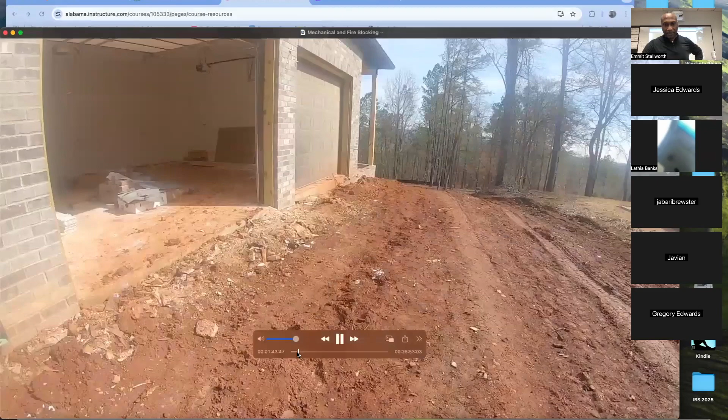There's certain things to meet code. You guys are gonna see one or two things that meet codes, stuff like that. But this is kind of where we're at. So here we go. So get past all that. All right. So here we go. Anything until that gets taken care of.

So if you guys look right over to your right, I left that over here when I just got finished talking to that subcontractor. And that's another thing, man. These subcontractors got to get on my page, man. Because he told the homeowner the price. He never should quote prices with the homeowner, because that sends a mixed message, guys.

When you have these subcontractors giving them prices, he don't know what else I need to charge them. And that's not fair to me. If he quotes them a price for the little thing that he does, I got to look at, now the painter got to come in, the plumber got to come in, do this right here. Now I got to tack on all those prices. And then when I come and give them my price, they're going to be like, oh, you the bad guy. Y'all see how this works?

So he doesn't need to quote a price. He should have just said, well, hey, okay, I got what you want. I'll get with Emmit and he'll get your cost. That's how that's supposed to work, guys. So when you're dealing with these subcontractors, you got to engage with them, man. And I remember one builder I knew, he wouldn't even let the subcontractors talk to the homeowner. He didn't even allow it. Now I understand why, because they just don't get it.

All right, here we go. Come on, guys, it's about business. I got to get rid of all these boxes out of here, man. So my HVAC guy should be here. We can hold on to these right here. So these are all the vents that we're going to put in when the floor is getting in.

Oh, we got to go to the unit. Yes, we haven't even gotten, so I guess you're going to connect it to that right there, but set up. It's always a good thing. Here, might have to do another trail. Get out here.

Hey man, how y'all doing? Everybody good? Good deal.

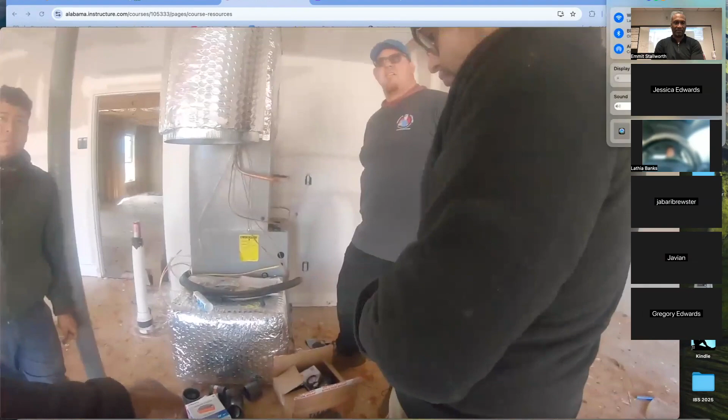All right, so I'm gonna need a bollard right here to keep these cars from hitting it. Okay, I see what you're saying. Yeah, probably most likely it's gonna be right here. Yeah, I think the code guy put it right there. You ain't got no pencil, do you? What do you need? Sharpie, pencil, something. I got one in the car, but I just want to kind of mark that. There we go. So about right here, right?

Is it posted, just in case. So that's for the unit, that's when cars come in, you don't want that car to hit that. So we're gonna have a little stop right here, and I'm gonna need one over there too.

Yeah, so that's another code thing, man. The code is gonna require me to put what they call a bollard, so that when cars come in they won't just hit the unit. Somebody, like my wife, won't come in and make a mistake and hit the unit like she hit the garage door.

Y'all need anything? Any questions? I got a question actually. So we gotta be within a 5 foot radius of any windows or basically anything for those IPEX.

So I was about to call my boss also. This whole sheetrock thing actually messed it up. We were trying to run it above all the sheetrock so you won't be able to see it. But now with the sheetrock there, I'm trying to see, I'll just show you.

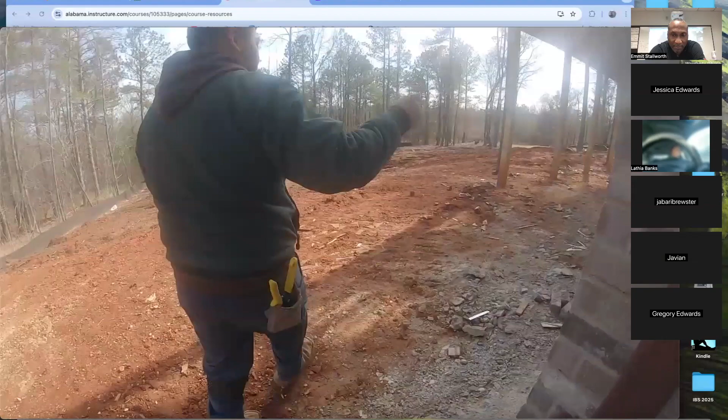I need a hole, about a 4-inch hole. I want this to work for you. That's fine. Do we need a bore hole there?

No, the deck is coming down right here, so that's not gonna be in the way. You need a hole right here? Yeah. Where you need it at? 5 feet from windows and deck.

Okay, you point to the place where you want it at. I mean, yeah, you can put a hole there. You got something that can drill it? That's the thing I don't.

Okay, so I had the guy do the holes over there already. I wish I'd have known, I could have gone ahead and put you guys a hole here too.

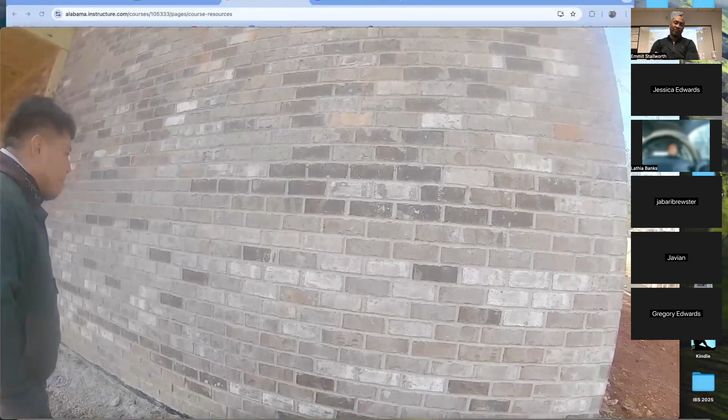Yeah, we don't know, this is my first time coming to this. Tell you what, mark where you want that hole at, and let me see if I can get somebody that can get a hole there for you.

Okay, and also, are you the builder? Yes, sir. Okay, and also I was gonna ask, you're gonna have to run it under the sheetrock. Is that okay? The only thing is it's not gonna look as pretty.

I'll tell you what I would do, or I'll give you another option. You can run it, you can open up the sheetrock, the decision's right here. Run the IPEX over, come on.

Where does that come up at? It's coming up from here. Yeah, it's gonna come over there.

Go ahead and run your piece up if you can get up in here and not mess up you guys' stuff. Because the reason we had to do the sheetrock, guys, is for the fire protection. It's a firewall.

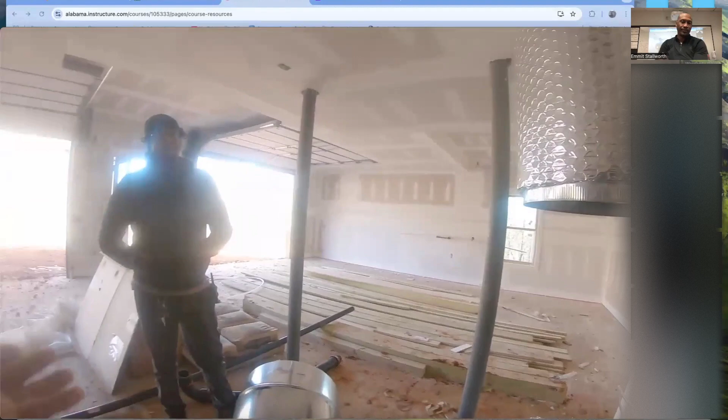Yeah, so you can run up in here. I don't know if you can see, but you got to cut a hole every so often to get your pipe through it, and then you can run it up.

You might be able to get it up in here. But however you gonna do it, you're gonna have to come down over here somewhere. Yeah, I'm gonna have to go over there. So if you got to come down, I think right here, then go this way, that's fine. I would try to wrap this.

Like if I got to come out right here and then wrap up around here, make it stay as tight as possible to the ceiling. I don't have a problem with that.

You can go out there and mark where you want your hole at, and I'll get somebody to figure out a way to get a hole in there. I put the holes over for your Freon too.

Yeah, so if I'd known, I'd had that guy put those in there too, drill those holes in there too. So yeah, if you got to go up in there, that's fine.

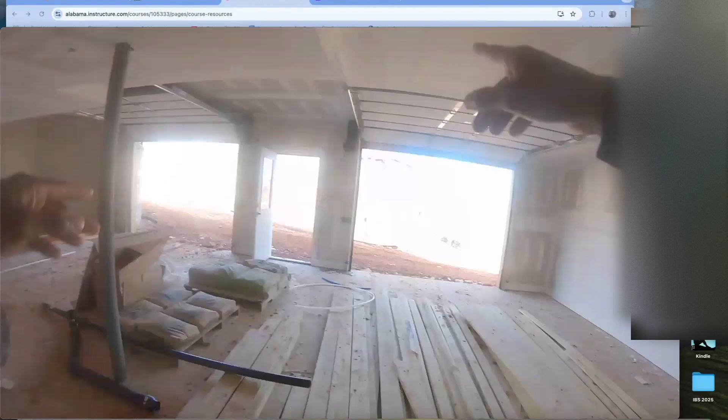So that's the pipe that's gonna stick out, right? That's it, so it's gonna stick out there. So I'll do the measuring for this. Okay, but you can't go...

Well, you gotta stay away from the window. 5 feet from the window, 5 feet under the deck. So looks like you need to be about right here. Yeah, that's the only option in this one.

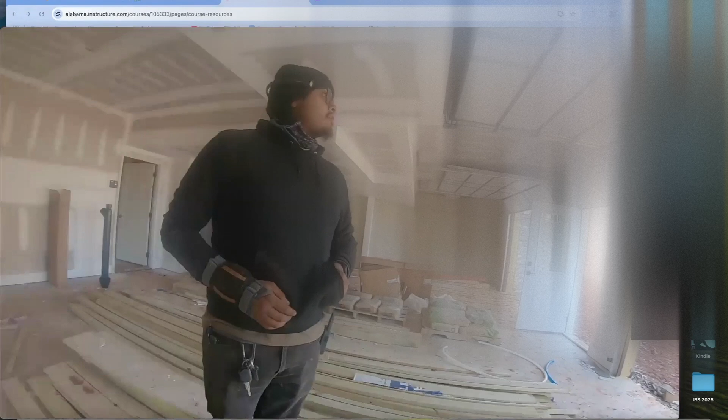That's fine. Can you go straight out that way? It's still the door. Oh, you got that door. Yeah, that's it. It is what it is.

Well, I just want to make sure with you. No, man, you guys are good. I'm gonna fix all this sheetrock stuff because we got all kind of stuff. My painter's gonna have to come back, and the sheetrock guy, they're gonna come back and fix it. You see?

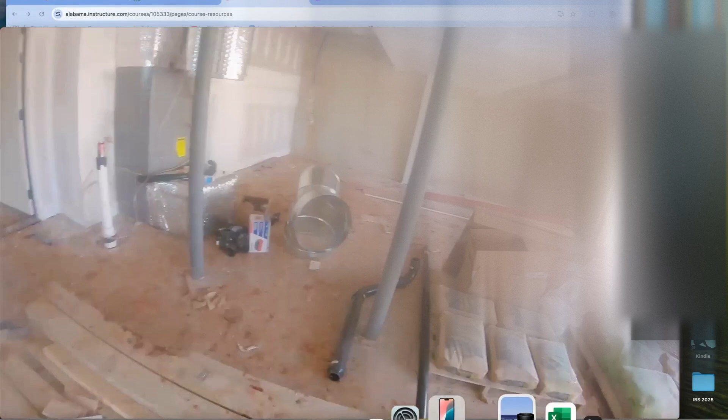Okay, all right guys, anything else? I'm glad I came out here. I think that worked out pretty good. You guys do a good job, man. I'm Kerry, man, he's the best. He's the best I've seen, man, and I've been doing this 20 plus years. All right man, you guys have a good one.

So I'm just kind of looking at, if you guys understood what he's saying, those pipes, that's a 90% efficient unit, so that unit is going to be more efficient than a regular gas unit. It's like 90%. So either you put the 90% unit, and I should have a heat pump upstairs, but that's going to be very energy efficient for these. Heat pump just means all electric, so the unit I saw first, that's all electric. And this right here is going to be gas, but it's a 90% efficient gas.

They ought to like that. But when you're exhausting out with that gas unit, you have to be so far away from a window, which is right here. And then you can't be under a deck, because those fumes can't go up and get trapped under that deck. So that's another thing, guys. So I'm just kind of coming back here.

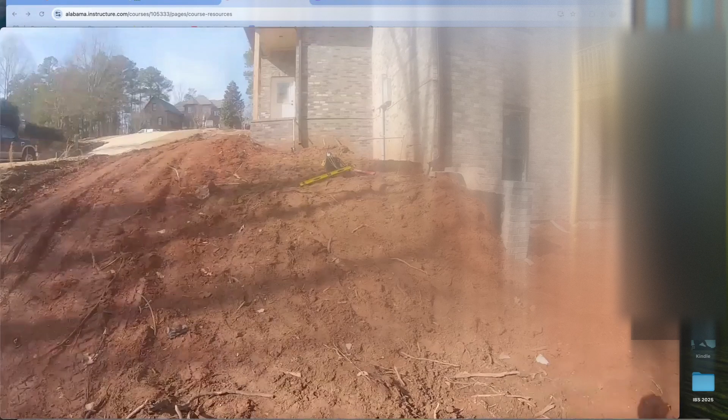So those guys are going to come out that wall right there, and that's what my units are going to be. Let's kind of see what my units are going to be. We may have to - let me just ask this guy one more thing. Hey man, I got one more thing. Do y'all know about the condensers? Do y'all know where y'all going to place them at? Let me just kind of have an idea of where they're going to go.

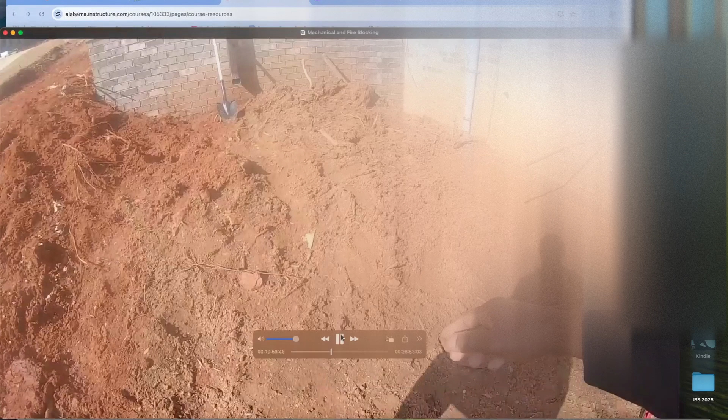It's another thing right here too, guys. I don't think you can go right by that power box, but you can put it right here on the side, this one on the side and that one right there. So you got one - where you set the little unit outside, we was gonna put this right here, but the HVAC guy put his stuff right here. So this has to be so far away from this by their code. This power box had to be so far away from the vent, from the dryer. So that shifted this guy over, right? And since this guy shifted over, then the units was going to be right here and right here.

So now I'm going to put one unit here because it's got to be like 6 inches away from the power. So I put one unit here and maybe one unit here. Does that make sense? All right. You got one that can go right here. I think one can go right here and one can go right here. I don't have a problem with that.

Okay, now if you can get both of them right here and it's not against y'all's code with this right here - I don't know your guys' code like y'all know it, y'all might want to get with Kerry. I don't know how far I got to be away from this guy right here. Yeah, we're gonna have to put it in. So if you put it here, I don't have a problem with that. And he had to shift his over because of this dryer vent.

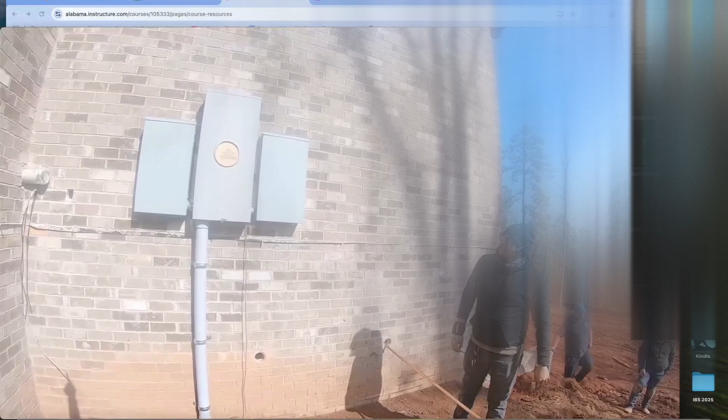Yeah, you see that dryer vent there? So he had to shift his over, which shifts you guys over. Or if you got your gas, it's gonna come out right here - the gas stub out is gonna come out right there. So you can't push it. So if you gotta put one here and one here, I think that'll meet what you need to do now. I guess you have to wrap that thing over here. Yeah, it is what it is. All right, we'll put a bush there to hide it.

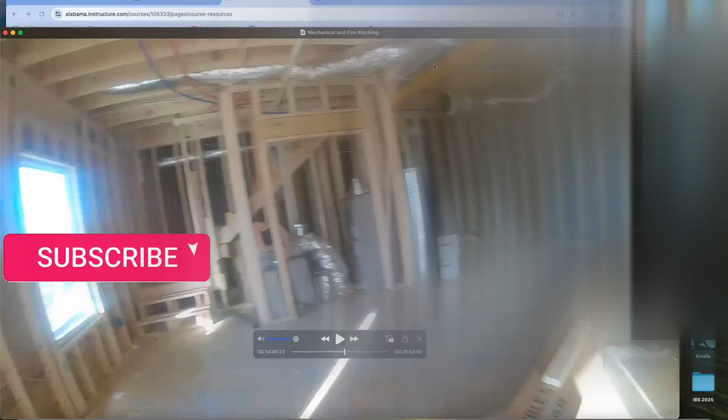All right guys, so let's see, he ain't got everything connected, man. This dude is just - he left the unit there, and now I gotta lock the house up every day. It's just, man, I tell you what, bud.

Couple different things, like stuff like this right here. I don't know if you guys can see that right there, it's just not good. Things like these guys got some of these studs - they're not supposed to touch the wall, guys. He said a half inch, I thought they're just not supposed to touch the wall at all. I got to look at that code because they're touching the wall.

Now, on the insulation, this wall right here really doesn't have to be insulated because the ground can be considered insulation. That's what the insulators would tell you - that's something that my insulator told me. Looks like we got a hanger that can go up there, so that's good.

Things like that. Let me organize here, I'm gonna put this up right here so the framers can come over here tomorrow. Good thing, and those are my hurricane clips. I'm gonna look, there's one or two more things. Let me see, did I talk about...

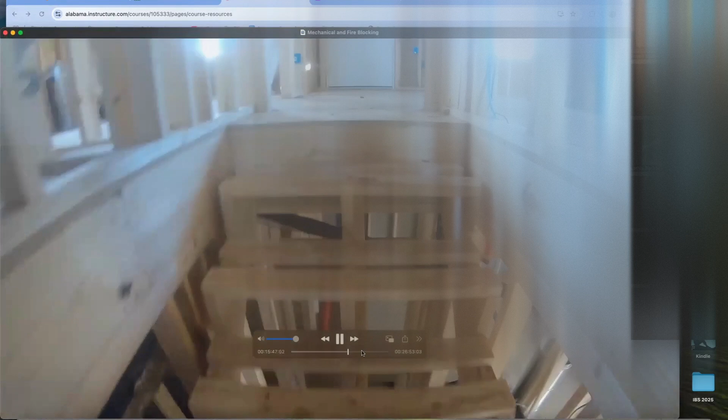So what I'm bringing here, guys, is hurricane clips. That was one of the things he hit me on - tie down, and the code item just hit me. A rafter tie down. So really these rafters, if you look up here, if you look right here, these are the rafters right here. So they have to be attached to this top plate. You have a double top plate up here.

So those clips, you're gonna put nails here, and those nails are gonna go here, and it's gonna grab both of them and hold them together. So that's what you need - the rafters, they need to be attached to that top plate. Yeah, so that's what I'm bringing.

Now you can actually do this with lumber - you can take that lumber and come down, but you got to attach to this. Well, you can't do it on - you can only attach to the ceiling joist. You can do it with lumber, but you got to attach to the ceiling joist itself, not the top plate, right here, because you really got to attach to a ceiling joist.

So what I'm going to do - I think these guys came over here and kind of cleaned up a little bit. Looks like things are kind of organized here, got everything off. So here we got, you can see, the inspectors are going to give you this card right here. I'm looking for, like, one of them you may have building, mechanical, electrical, and I'm looking for the rough inspection to be signed off.

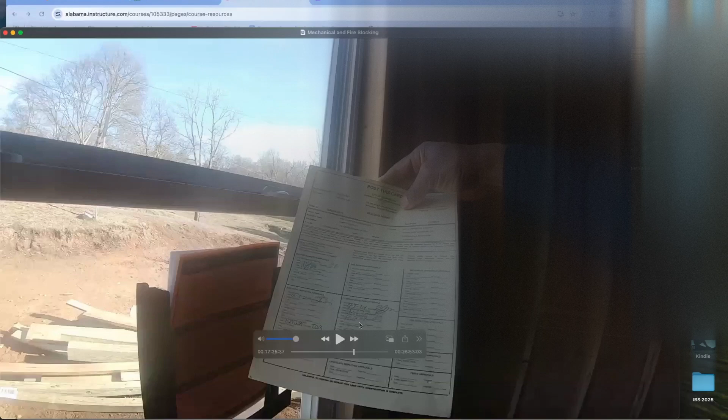So that rough inspection is not signed off. Like right here, I think this right here is the electrical. Mechanical is right here - he hadn't signed off on the mechanical yet. Plumbing, the plumber got his signed off on. This right here is the slab, foundation slab, when we're doing all that stuff, the footings and the slab - so that's been signed off on.

Electrical rough, walls and ceilings is off. Still don't have the mechanical guys, but he made a note on the back - it says mechanical is just not complete. It's okay, partial mechanical rough. Oh well, I'll tell you what, we'll be fooling around here with mechanical for a year.

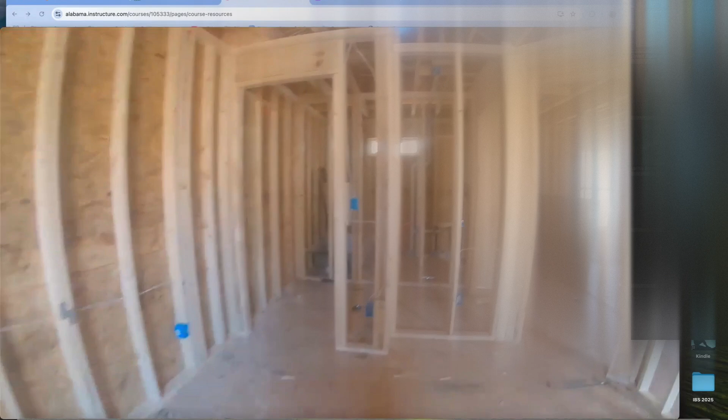I'm looking at my vent fans. He still hadn't - taken me, the vent fan, if you guys can see up here, yeah, so that's the vent. This needs to have a pipe that goes out the top of the house. He hadn't done that yet.

Yeah, I just don't get it, man. He cut a hole in the roof, but he hadn't connected the pipe yet. I just, golly, man, I tell you what, man. He got a hole in it, but he ain't put the vent up there. Oh my goodness, boy, this is what I tell you - it's a wrap, man.

We'll come through here. Guys, I like to try to find all the holes before I stick this thing up in here because I hate to use a whole thing of this stuff. Oh yeah, this right here needs to be sealed, that whole area. So I need to bring something else to do that. See any, things like, let's see, I don't know if I can get up in here. Let's see if I can get a picture of it when they get started.

You see that right there? See it around them pipes with that orange stuff. So if there's a fire that catches in the basement and it's trying to go up to the top, it's sealed so that the fire has to burn through that orange stuff in order to get to the top and set the top on fire. Gives the people a little bit more time to get out the house. Does that make sense? All right.

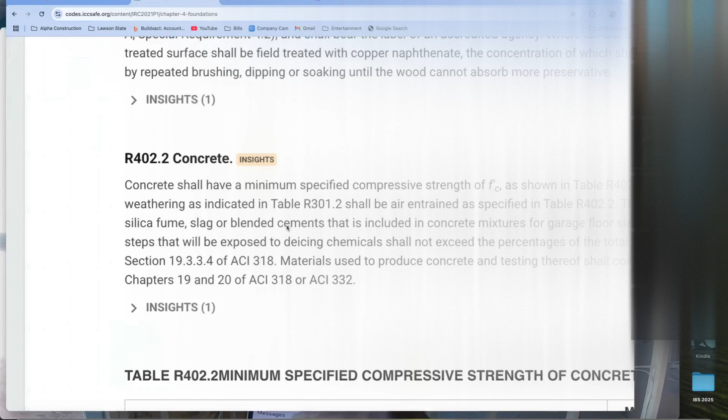Okay. The concrete itself. So guys, you don't have to guess about this stuff. You can go right down here and it gives you the different type of foundation that you got. You got slab on grade, which is like a monolithic slab. You have a crawl space.

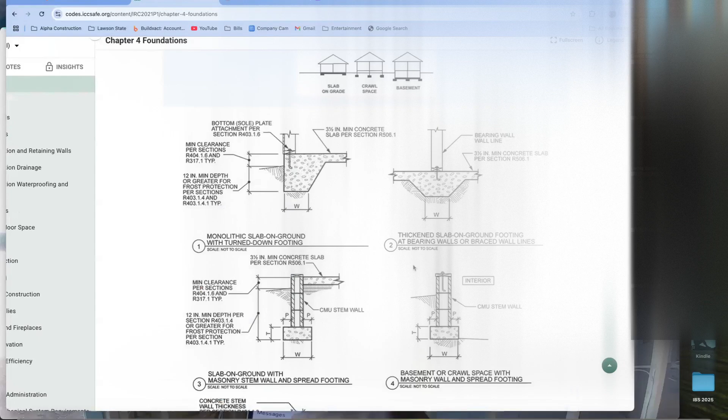Remember, crawl space, you got a wooden flooring system on it. And then you have a basement like the house we just got finished doing. Okay. So you got all that, and you can go through and it just breaks everything down. So this right here will be like a slab on grade. So this would be a monolithic slab. The slab and the footing is all one pour. We call that a monolithic slab on grade.

And then on the interior walls, the interior load bearing walls, we have what you call a grade beam. A load is hitting that grade, so you got to pour that concrete a little bit thicker in that area. Then this right here, this will be where you have your regular footings and stuff.

So this one is a footing with blocks, and CMU stands for Concrete Masonry Unit. So it could be blocks, or it could be... I mean, they make a lot of different types of concrete masonry units, guys. Not necessarily blocks, but blocks is the most common one. So you also have your footing as well. And you have your anchor bolts.

Y'all see these anchor bolts here? I wanted to show you guys something about those. You guys do know what anchor bolts are. You anchor that, it keeps the house, like when the wind comes and tries to uplift the house. This is what the anchor bolt does. It holds that bottom plate on the ground.

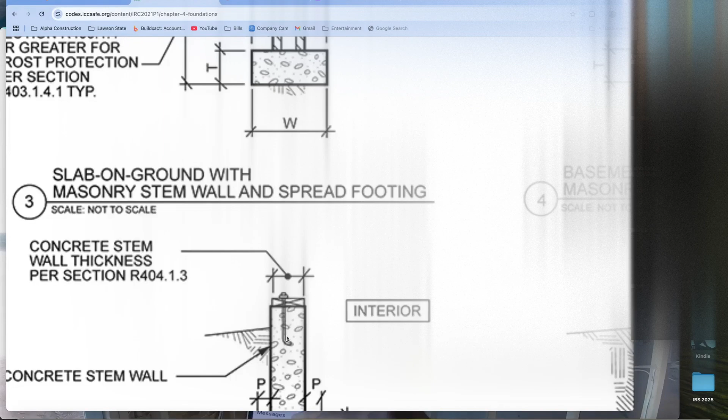And I had a good YouTube video on that. Let me just see if I still got it here, guys. I think I still got it here. Let me see. I can't get down here. Let's see if I got it in watch later. I think I got it right here.

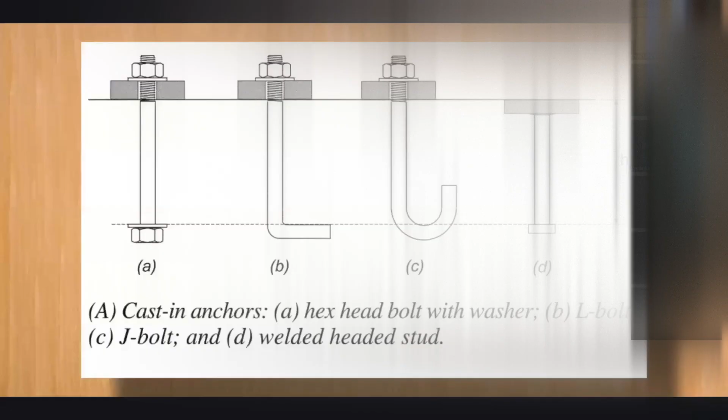This is an L-bolt. If I see these on one of your projects, I'm probably not going to say anything, but I might give you this look right here. L-bolts and J-bolts fall into a family of cast-in anchor bolts where they're used to tie elements down to concrete. They've been used for decades, anchoring your walls down to the foundation, or anchoring deck posts down to the foundation, and they've been used by our friends in the steel industry to anchor down column base plates to the foundation.

These things are very strong, they're very durable. However, engineers are phasing these out and just aren't using these on our projects anymore. L-bolts or J-bolts should not be used where they're required to resist uplift forces. Uplift forces I'm referring to are wind-induced at the roof level, which transfer into the load-bearing walls, your rafters, or...

Hey guys, by the way, we're in that area where you get a lot of uplift. Tornadoes and hurricanes, we're in that area, Alabama, Florida, Texas, and all those areas. So by code, we're in those areas.

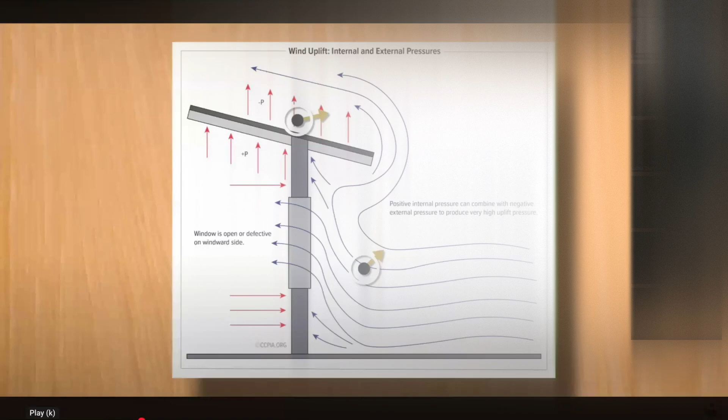If the wind force acting on your building is greater than the weight of the structure resisting the wind force, your home will have a net uplift force. But based on updated wind design speeds in recent editions of the code, it's safe to assume that the average single or two-story home will have net uplift forces. It's not that this thing is weak in tension. There's only a small portion of this rod that can be utilized to determine how much this can resist as far as uplift. And that scenario is what we call pull out, the ability of this thing to stay in the concrete without completely separating out of it.

When we do that calculation, I can only use part of this bar that would be in direct contact. Now, you would also think that if I pull up on this, there's concrete around the bar that's in contact with this concrete from friction. But unfortunately, we can't use that friction in our calculation. Now, the other reason why I don't utilize these is because of constructability. These are cast-in anchor rods, which means that these have to be installed into the concrete before the concrete hardens.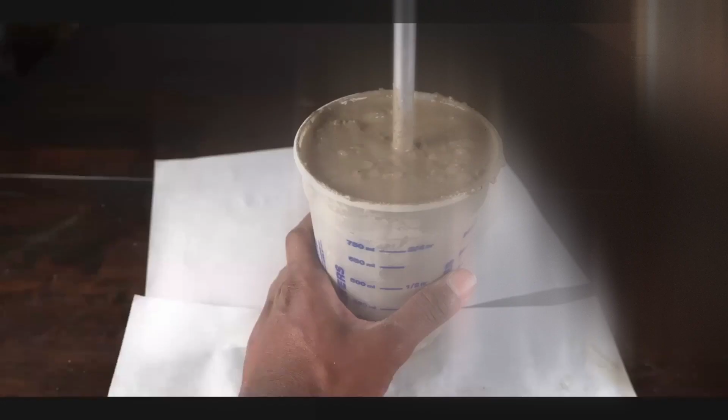So you need to move quickly, making sure that the anchor is deep enough, it's spaced at the correct spacing that's required, and make sure that the anchors are straight and plumb so you can thread your sill plate through the anchor rod and then fasten it together. Ask anyone who does this for a living. It's difficult. There is another class of anchor bolts that I would recommend that can be installed after the concrete hardens, which we call post-installed anchors. So the type of anchor that I typically specify is what's called a screw anchor.

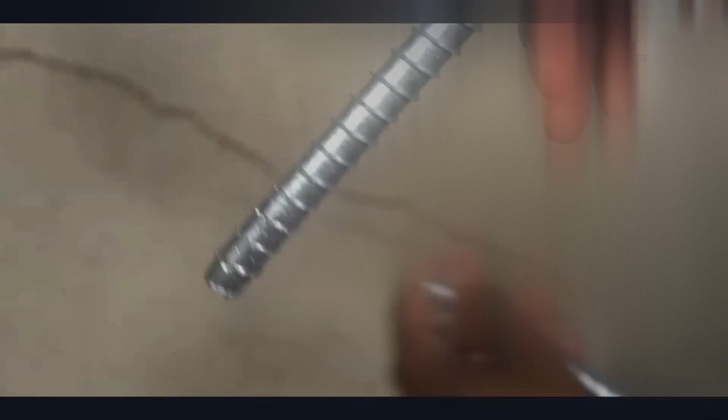It's exactly what you think it is. It's a screw with the threads around there. The way that this is installed is that you drill the hole first. You clean out the hole you just drilled. You set your sill plate and then literally screw this right into the concrete and tighten the sill plate. These things are strong. They have a lot of capacity, if not more, in some cases than a cast installed anchor, and these are available everywhere, including your nearest hardware store.

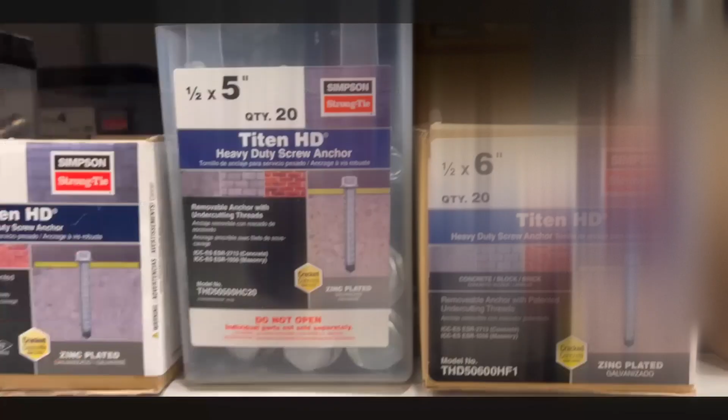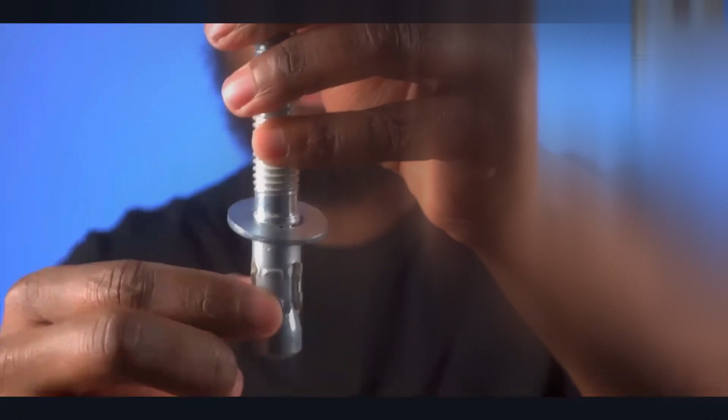Another option pretty similar to the screw anchor is what's called an expansion bolt. These things have great capacity, in some cases even more than what a screw anchor has. And it's installed the exact same way. The only difference is that when this is tightened to your sill plate, these flanges at the bottom right here will push down and into this bumped out piece, and these will spread apart, locking it into the concrete. So it's another great alternative as well.

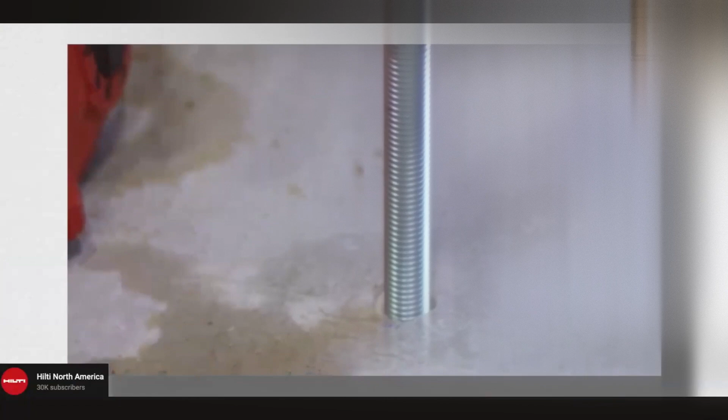And the last is similar. You drill the hole large enough where you can set your threaded rod inside as deep as it needs to be. And then you have this epoxy material that gets poured into that hole, creating this really tight bond to the concrete and to the threaded rod. And these are honestly one of the strongest ways you can anchor something into concrete.

Now, I'm mentioning this, recognizing the fact that the International Residential Code allows L and J bolts as a foundation anchor. So depending on the codes wherever you live, they may be perfectly fine. However, if you ask an engineer about using L or J bolts, they're most likely going to tell you no. And for individuals who don't really have a lot of experience doing building construction, there are so many options that provide the same capacity as an L or J bolt without all of the skill that's necessary to be able to install J bolts correctly.

Questions on that, guys? It's like, man, YouTube is great, man. I'll tell you what, man. You guys make a YouTube channel, all right? All right, let's keep this thing moving, guys. So let me just see, where was I at? I was right here. All right. So let me see what else we have on here.

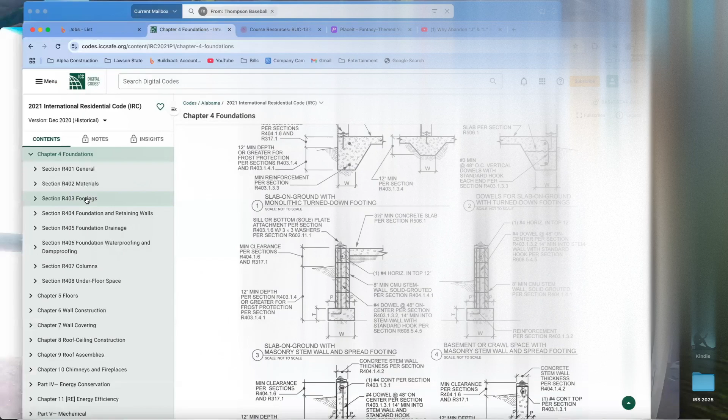Now you can also, I think this may be a wooden foundation, pressure treated foundation. So this is another. All right. So let me kind of go right here. So we have chapter 4, foundations. So you have the general, you have the materials, you have footings. We talked about footings, foundation and retaining walls. So you can hit that and you can kind of go over the foundation and retaining walls. So this right here talks about those foundation walls that we use.

Retaining walls. Are you guys familiar with those foundation retaining walls? Have you guys seen foundation retaining walls? What's going on, man? They look like this here. Sometimes I might have to have all this stuff already pulled up before you guys get here. I always jump off into something else, man. Let me just see.

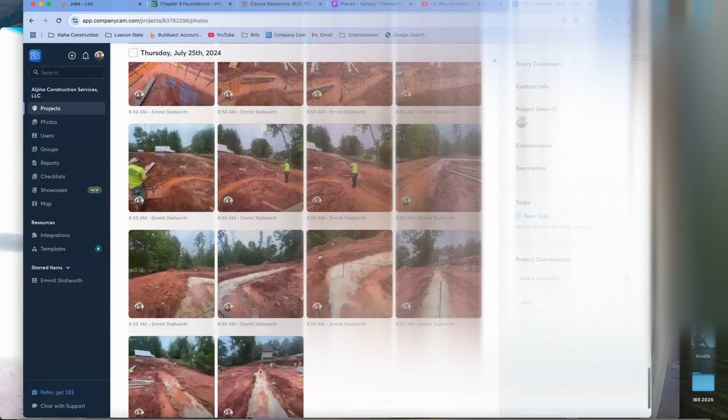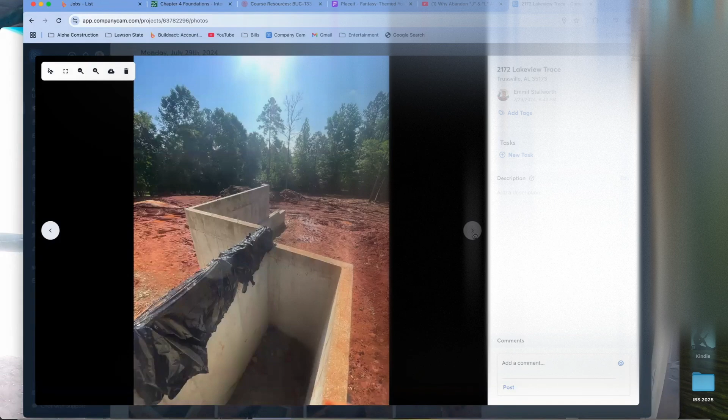So this is my foundation. So we got your footing here, and this right here is my foundation retaining walls right here. And I don't think I have where they actually formed this one right here, but you gotta put those anchor bolts in those, and you gotta put dowels in. This is what the foundation walls look like. So that code that we were just looking at addresses how those walls are supposed to be set up, how thick they need to be, the reinforcement that you're going to have in them.

Are there any questions? And then you can go right here. So now we can go to foundation drainage. And then you got the different type of soils that's involved. You have precast concrete foundation, wood foundation, how you drain that, drainage system. Then you got waterproofing. So now, say for instance, on this particular house right here, let me just see if I can get you guys. See, this is the walls right here. You guys can see where I have the brick ledges. This is where I lay my brick at.

And then what else we got here? Then we're going to break that down. We get into the waterproofing. So now these guys, and I didn't catch them before they actually did it. Let me see if I got it right there. So this black stuff that they got on here, it's kind of like a tar.

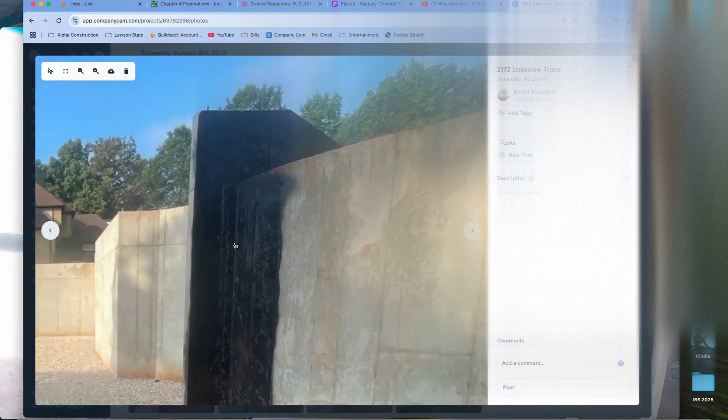That's my waterproofing. So they sprayed that on there. So it keeps that groundwater, so when that water comes in through the ground, it keeps that water from coming inside. Because you guys got to understand that concrete is actually porous. Got holes in it. Sucks up water. And so you gotta waterproof that.

Now that may not stop water. You're probably gonna have some remnants of water trying to get in there. So what you got to do is if it gets in, you got to go on the inside and deal with the water on the inside. So they use hydraulic concrete to put on there and patch it up on the inside to keep it from leaking, keep it from coming on through. And that hydraulic concrete, when it gets wet, it expands. So it really locks that water in. Does that make sense? So this is what the waterproofing part of it looks like.

So also with that waterproofing, you have a foundation drain tile. Remember, I think we talked about that in another class, where we had the gravel that's put down there. You got this drain tile with holes in it so that groundwater goes through that gravel, gets sifted through the gravel, keeps all that dirt from getting in there. Once it gets into that tube, then it flows to the daylight. Goes all the way out to it.

Yeah. Now you know you got a driveway coming down right here, right? So we're gonna get a solid pipe, not the perforated pipe, and we're gonna run it up under the driveway and dump it out on this side of the property. Before you pave the driveway? Yeah. Before we pour concrete. You can see the gravel.

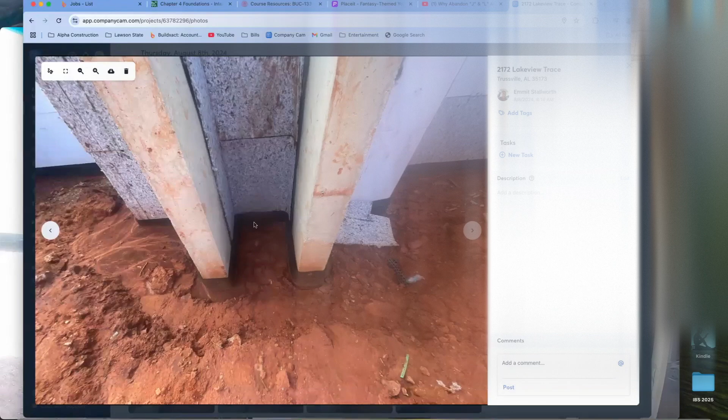So this is what the waterproofing looked like. See how that little sock thing comes around here, goes around here, goes around here. It's taking all that water. And this is what it looks like if I make it bigger. This is what it looks like when you open it up. You got these little holes in it. Takes that water and moves that water around. It's like that plastic? Yeah, it's a hard plastic. I think I picked up one of them and took a picture of it.

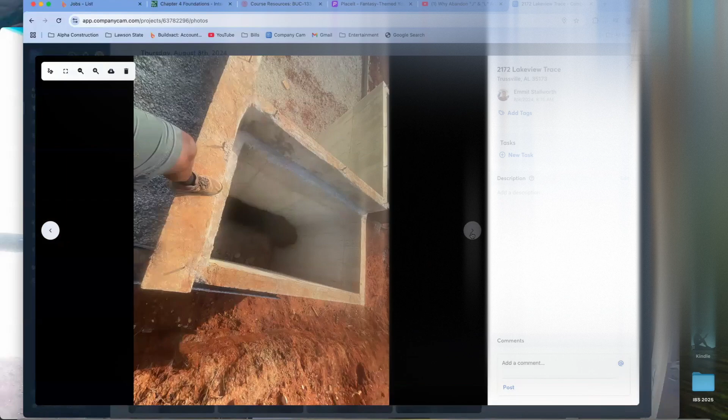And you notice I also had that pipe going all the way through this little stoop right here. This is what it looks like, you see? And the reason that we got this foam right there is so that when we do our backfill, the rocks and stuff don't break this black seal. See what I'm saying? You don't want it to bust it open, then water gets in there.

Ground rod, I did earlier. Yeah, there goes one right there. There goes a ground rod right there. Yeah, it goes into the concrete. Goes into the footing, and it attaches to the rebar in the footing. Let's see what else I got. There goes another ground rod. You see that ground rod right there?

Oh, shucks. Oh, man. I hate when I do that. We got to figure this out.

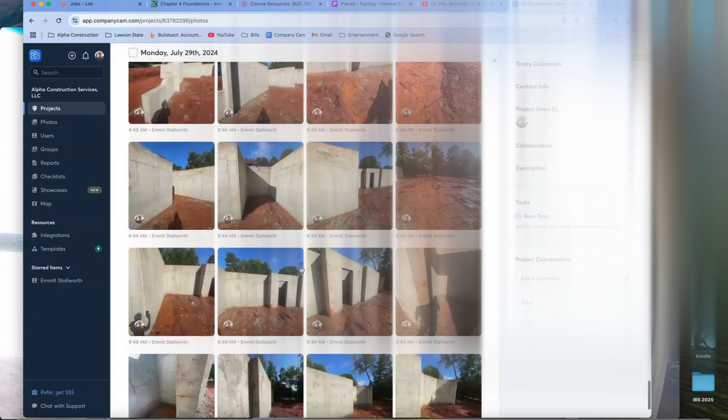So does the rebar go all the way to the top part of the house, so that if lightning hits the top rebar, it ties all the way down to the ground? No, that's not what it's for. It's not to redirect lightning. They don't even think about lightning. That's not even a thought. The whole purpose of the rebar and the grounding is to take the power that's coming from the power company, like Alabama Power, and redirect it to make sure that the people on the inside of the house are safe when they're dealing with the electricity of the house.

So say for instance, if I go stick my hand in one of the electrical sockets, instead of that socket trying to use me as a ground, it'd rather go to that rebar and go to the footings. It's gonna go to the quickest path to the ground. It's not gonna want to go through me and then go through here and then go to the ground. It's gonna go straight to the ground to that rebar. That's the purpose of it.

It has nothing to do with a lightning rod. It's not trying to redirect lightning, stuff like that. We don't even think about lightning. We figure lightning, when you're dealing with homes and stuff, is what they call an act of God. You know, if your house catches on fire and it was due to lightning, that's an act of God, and the insurance company is supposed to take care of that.

Like hitting a deer. You riding down... my wife's sister hit a deer, driving to Florida in a new Tesla. I'm the one that talked her into getting a Tesla, man. I talked her into getting a Tesla, and she got it. The reason I talked her into it is because they gave me a $1,000 bonus. So I got somebody else getting one too. But yeah, she hit a deer.

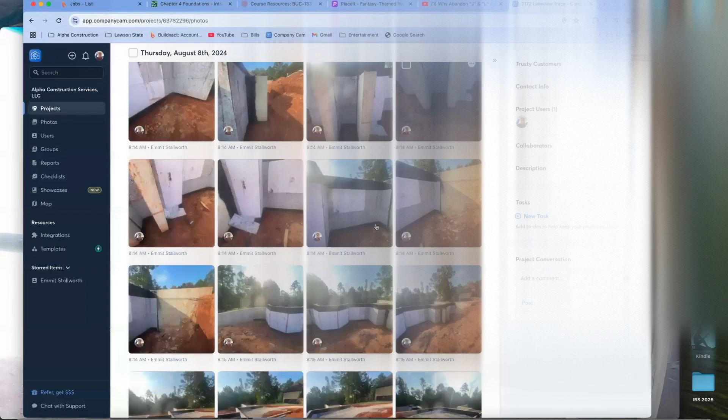So if you look, let me see. Let me go back here. There we go. So that's my polyethylene. Code says we got to put that in there. So this right here, that's below grade, right? So the reason that we put plastic there is because groundwater is always trying to come up.

You ever go in a basement, man, and the basement feels wet? Well, that's why. The older houses, they didn't do that back in the day. Even when you go into a new house, you still feel that humidity. You got more humidity in the basement because of groundwater. So the code says, hey, we got to put 6 mil.

Now, I think this new code says you got to use 10 mil. Yeah, 10 mil. The 2024 code, I think they bumped it up to 10 mil. So that's some really thick stuff. And this guy gave me a break. I think he was on the new code. I did this right here as 6 mil, but he was like, the code says 10 mil, but he cut me a break. Said, man, don't worry about it. So I actually didn't do that to code.

So let me see what else we got here. So that's below grade. Porous fill, backfill, columns, underfloor space. It goes into unvented crawl space. So now we're dealing with crawl spaces. Typically on crawl spaces, you got accesses. And like here, access openings through the floor shall be not smaller than 18 inches by 24 inches. So you got to have access.

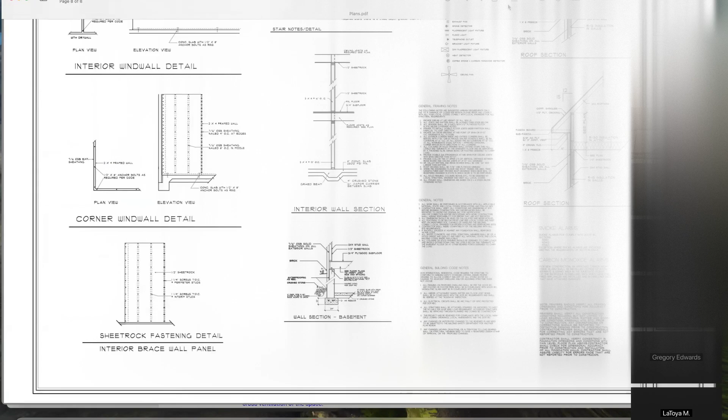So this is what he puts in. He puts in that J bolt or L bolt, the L bolt - you see that? The notation. Yeah, so he puts this in right here. He says it says sill, hook - a hook anchor bolt, 6 inches, every 6 feet on center. Locate first bolt 12 inches from corner. That's basically what the code tells you to do.

Yeah, but he doesn't tell you what type to use. I mean, he got the one - it looks more like the L bolt that you know what I'm talking about, that I use. Yeah, but as long as it's engineered, man. Some people don't even use those bolts - they got a little plate that goes up under that thing, and then it wraps around the stud, and they nail it in.

I've seen that before. But he also talked about it's not required, because I guess that was on the West Coast. No, the anchor bolts are required. Oh yeah, here they are. I don't know, they may not be required out west, but they're required here.

My first house I built, man, my cousin didn't tell me that, but I didn't use anchor bolts because I didn't go get them, and he was like, 'Well, it ain't gonna matter.' I was like, 'Okay,' because he was like, 'Well, you know, the weight on the house is gonna be pushing down anyway, it ain't gonna go nowhere when you get it up.' I mean, which he's right, but that's not what the anchor bolts are for.

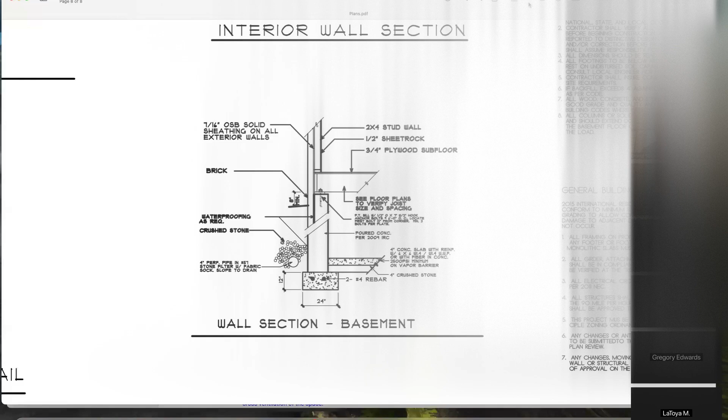It works, yeah, but it needs to be now. I would also have some documentation just in case, because if these plans are drawn like this, the inspector could look at this L bolt and say, well, you said you're gonna put L bolts on it. You see what I'm saying? And if he approved this plan, and you used the other bolts, the red heads and the other bolts he had, well, you didn't say you were going to use that. So he could say, as long as it meets or exceeds the code, we're good.

Meet or exceed, that's the thing, guys. It has to exceed the code, it can't be less than. So like I said, if I see this and go out there and check, and he did something other than what this is showing, I can question him and say, hey man, you need to show me some documentation to make sure this work. So that does happen too, by the way.

All right guys, let me figure this out. So that's the foundation, that's chapter 4. Let me see if I can bump this in. Chapter 4, are there any questions on chapter 4?

I had some questions on the previous chapter, but I was driving, couldn't get in. Yeah, on the video, when you were showing the placement of the HVAC systems.

Yeah, let me hold on, let me come back and pick it back around on that, because I want to go ahead and knock this out, and then we're gonna go back on the HVAC.

All right, chapter 5, guys, so let's look at chapter 5. Now mind you, it should be easy to remember: chapter 4, foundation, FOU, foundation, you see what I'm saying? That's how I remember. Chapter 5 is F, floors. Yeah, floors, so we're talking about flooring systems here.

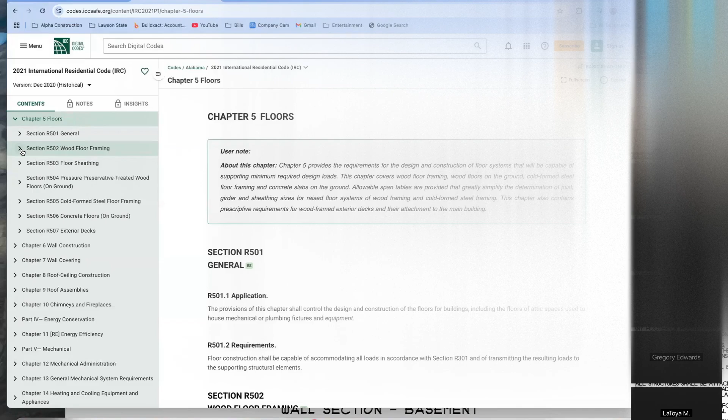All right, so if you break this down, guys, we got wood floors, so it breaks down chapter 5. I'm just gonna make this big, see if I can make this... oh man, I can't, this thing won't push me over here. Guess it won't, I was trying to make it big. All right, so if you look right here, we got floors, this whole thing is talking about floors. So you got your general, wood floor framing, floor sheathing.

Y'all remember that? You got your framing, you got your sheathing, you got your pressure preservative-treated wood. Now, steel floor framing, they got that going on. Concrete floors, exterior decks. And I think that's it on that. Questions on it? So this is how you look at those floors. So guys, remember decks, those exterior decks are on the floors, 507 is going to be where your decks are at.

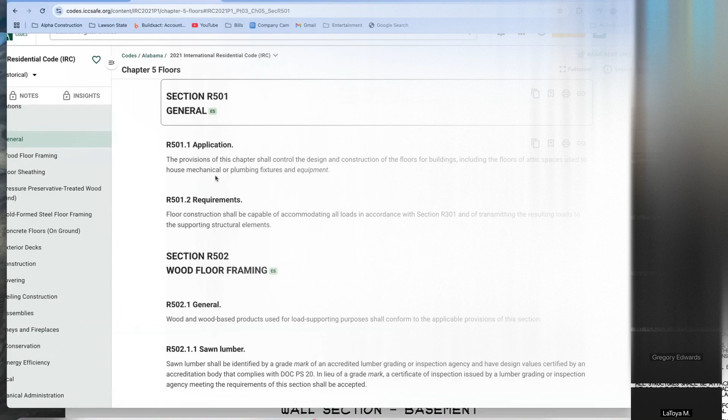So let's just kind of look at each one of these. So the general part, if I can make that smaller. General: so you talk about the application, the requirements. The provisions of this shall control the design and construction of the floors for buildings, including the floors of attic spaces used to house mechanical or plumbing fixtures and equipment. So that's what this is about.

So we start out with wood flooring, wood floor framing, and it's going to go over all that stuff. It's going to go with lumber, sawn lumber, treated lumber, end-jointed lumber. Yeah, we remember we talked about that end-joint. Well, that was another class. We talked about the end-jointed lumber, prefabricated wood I-joist systems, structural glued laminated timbers, a glue lam, that's what they call them, and structural composites.

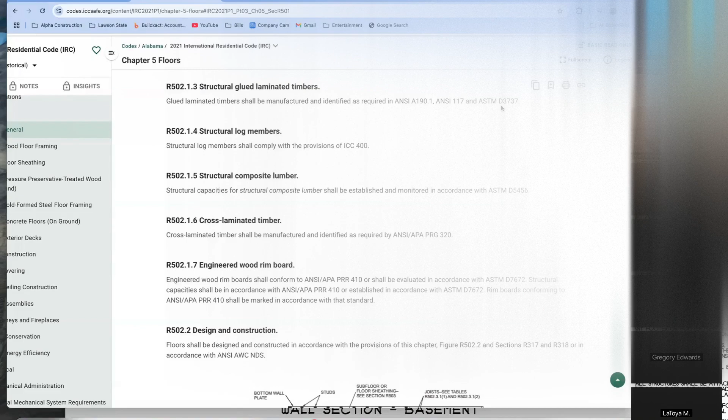And notice how it kind of sends you somewhere else with those right there, it tells you to go to the ASTM standards, we're gonna talk about that later in this class. But they talk about that because those things are not covered by the code. Those things are telling you that they have a whole other system they use to say, hey, this is how these products should perform, and as long as it meets that requirement, you're good, the code says okay, we're good with that. It's kind of like engineers. Engineered wood rims, and we also have design and construction, but this is a typical flooring system, guys, if you can kind of see how that looks.

This is a typical floor system. Let's look at this right here, and this is the terminology. You can see your sill plate, that's the one turned like this. Then your rim board is turned like that. So your sill plate's like that, and then you have your band, rim, or header joist.

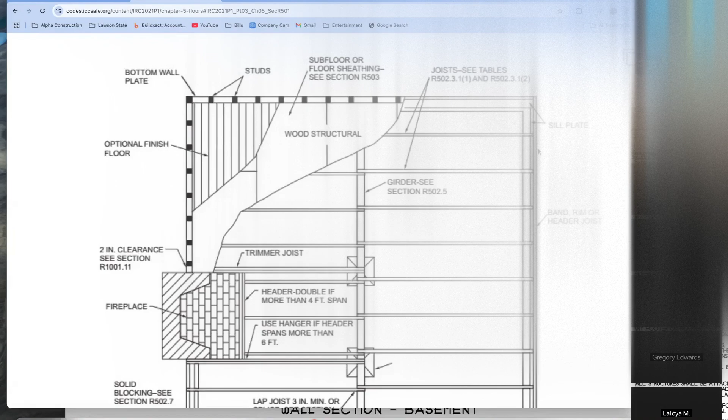Now, my understanding, I could be wrong, is this is calling this joist. You see this joist, that little skinny joist right here? Y'all see this? I'm talking about this guy right here. This joist is called the band, rim, or header joist.

Now, I thought it was called the header joist if the flooring joists, which these are the flooring joists right here, if the flooring joists are perpendicular to it, it's called the header joist. That was my thought. I think I'm still right on that.

So then you have your sill plate, that's the plate that goes on the concrete first. And then the flooring joist sits on top of the sill plate. And then your rim joist butts up to the flooring joist. That's how that works. This is kind of like we're just looking down at a flooring system, guys.

So remember you got your girder. You got the weight of your house right here, so you got your footings and stuff that's holding this up. That's your block walls with the sill plate. And then right in the middle, we have what you call a girder, maybe 2 by 12s or something like that, all lumped together. And those flooring joists sit on top of that girder.

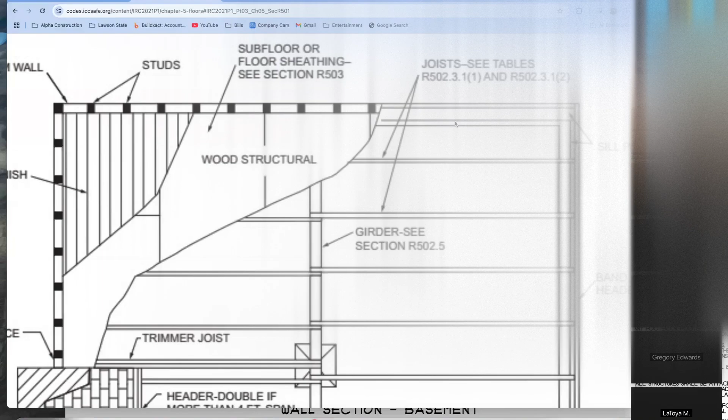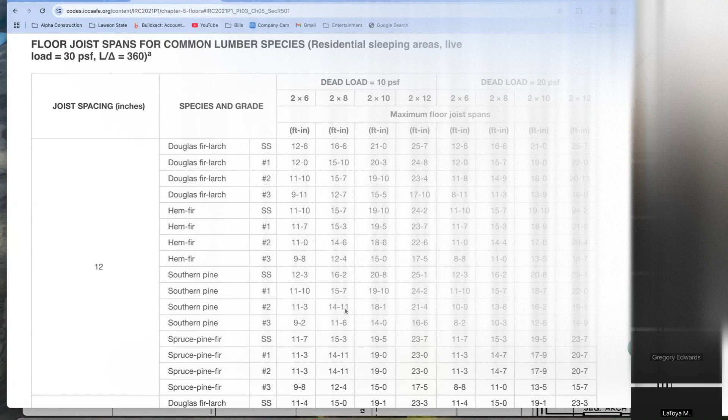So it says that if you use number 2 lumber, and let's say typically we use southern yellow pine right here in Alabama, and we're going to use 2 by 8s, the span is going to be 14 feet 11 inches, basically 15 feet. So if you got a room that go from here to here, 15 feet, you can take those 2 by 8s and be 16 inches on center, because right here it tells you, let me see, is it 16 inches on center? Maximum floor span, floor joist.

It should tell you floor joist spans for common lumber, residential sleeping area. Oh no, this right here is 12 inches on center, see this right here? If you want to be 16 inches on center, the farther you go out, the weaker that lumber's going to be. So if we did the same thing, used number 2 lumber with southern yellow pine, and used 2 by 8s, we can only go 13 feet.

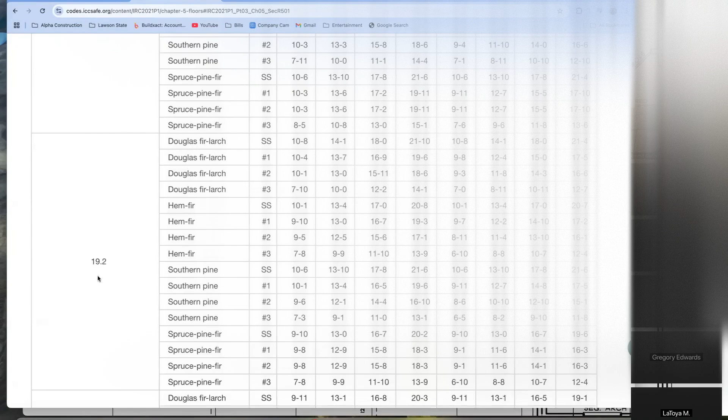And you can even go out to 19.2. You can go out to 24, you can make them 24 inches on center. It ain't gonna be no big room. Now you've busted it down to 10 feet, so you got to have a room that's less than 10 feet.

This is where this guy gets that information from. So the plan designer gets his information from this code book, and then he knows how to draw this stuff up, how to do this right here. So he knows how to go to this floor and say, okay, this room here is 12 feet, about 13 feet wide, so we're gonna span those flooring joists this way, 2 by 12s at 16 inches on center.

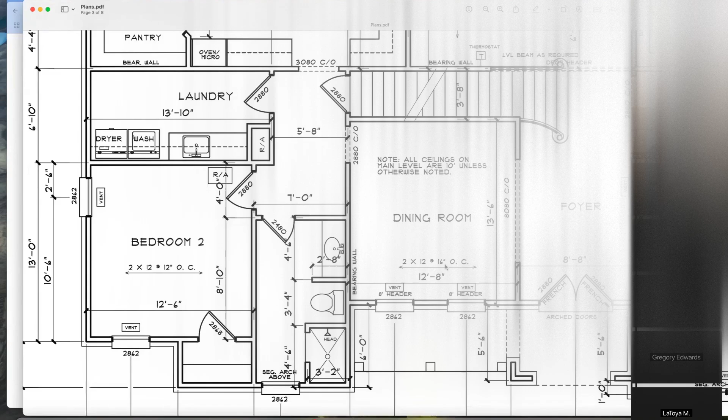But you should be able to check that. You guys should be able to go to your code book and look right here. You can look at what that guy put on his plan, go to this right here, look it up and say, okay, he got that span right. They're gonna expect you to do that as a builder. If you're a builder, that's why.

If you look at his plan, I'm gonna show you something else too, guys. If you look at his general notes, he's gonna say the following notes are suggested minimum requirements. And he's going to say something about anything that goes wrong, the builder should have checked it. All work should be performed in accordance with all applicable national codes. Contractors should verify all conditions and dimensions at site before beginning construction. Any discrepancies shall be reported to distinctive design or something like that.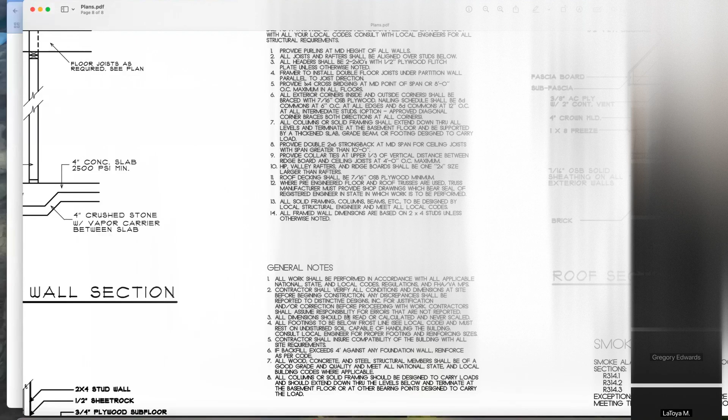But he puts that thing on the builder. Contractor should check that. Questions? Anybody got questions on that? So this right here is your span table. This span table is for floor joist spans for common lumber species, and this is residential sleeping areas. Live load equal to 30 pounds.

Y'all know what a live load is? Somebody give me an example of a live load. Is everything plus the people or whoever is inside the structure. Yeah, it's things that can move, like furniture. You can move furniture around, right? So furniture, that would be considered a live load.

Dead, man, you know, I might have to take one of these things right here out. A dead load, let me see. I'll take this out. That'll help charge up this thing. All right, give me just a second, guys. Can y'all hear me at home? They can't hear me. Let me see. I can hear you. I thought I had to change my mic. I had to unplug this microphone because it's sucking up too much power, and I didn't have my computer all the way charged up when I got here. So yeah, we good now. All right, let me get back here.

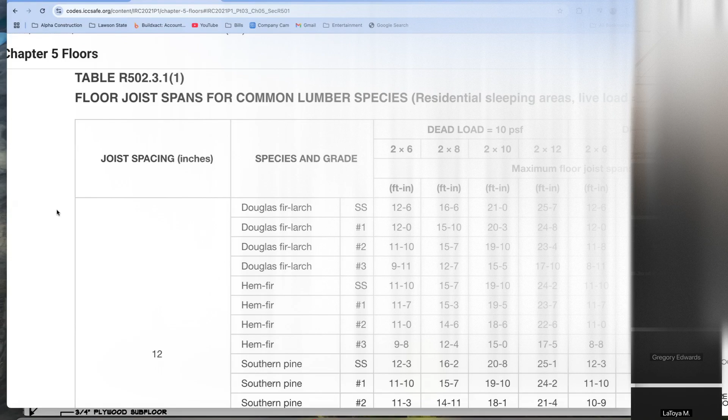It doesn't stay put. Countertops. A tub would be a dead load. A tub is sitting in one place. That's a dead load. You don't move those things around. So this is what it's talking about. Let me see what else spans. So we got other floor joist spans for common lumber species, and then it increases the live load. I usually use 30, the first one. Like in Alabama, we just use 30.

All right, guys, this right here is another important portion too. Let me just make sure I got this right. It also addresses cantilevers. You guys ever heard of cantilevers? So a cantilever is like on a fireplace where the floor bumps out a little bit. You can see it on the house. It kind of bumps out. This house I built got a cantilever on it. Let me just see.

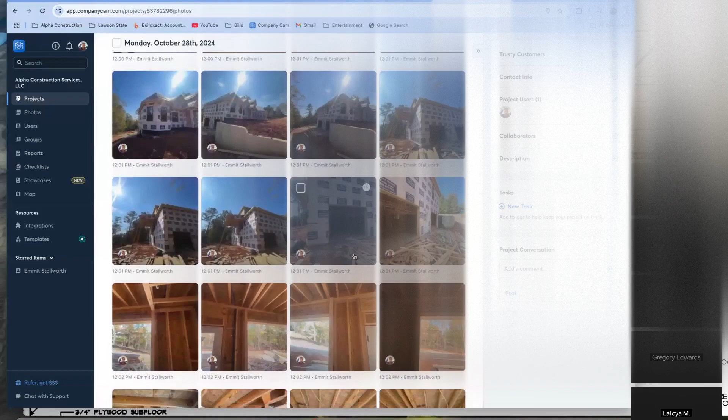Let me see if I got it framed up. Let's see if I got a picture of it. Dang it. Thought I had a picture of it right there. Got everything but what I'm looking for. I gotta take better pictures. Here it is right here. This right here is a cantilever. You guys see that?

Shucks. I gotta figure this out, man. I keep pushing this thing over. Maybe I can stop this thing from doing that. I had a perfect picture of it, man, and I just couldn't.

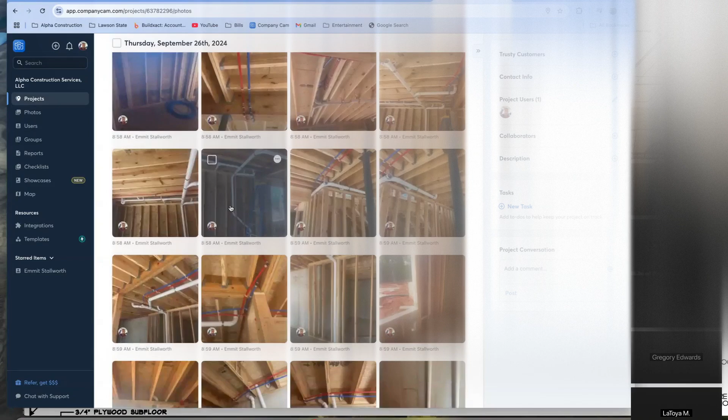This thing right here moves slow. It's trying to download. Where's that sucker at? So this right here, yeah, this right here is a better picture, but it's right there in the middle.

This right here is a cantilever. You see how this protrudes out, but it doesn't have anything under it? It's a cantilever. Now I know it doesn't look like it, but this lumber is one continuous piece all the way on the inside. You see what I'm saying? All these floor joists are one continuous piece all the way. Does that make sense? And that piece right there is being held up by the other floor joists. All right, so that's what a cantilever is.

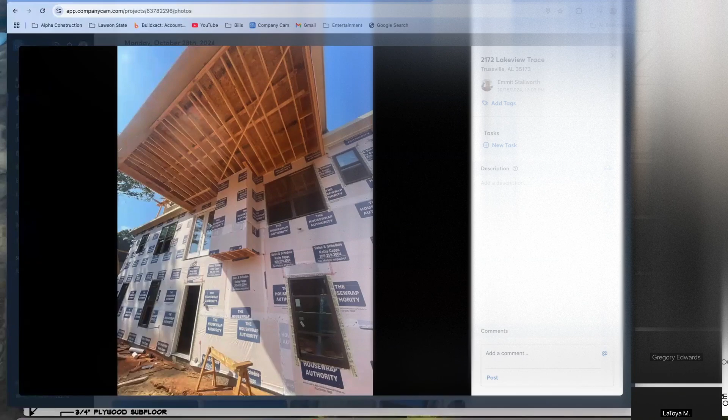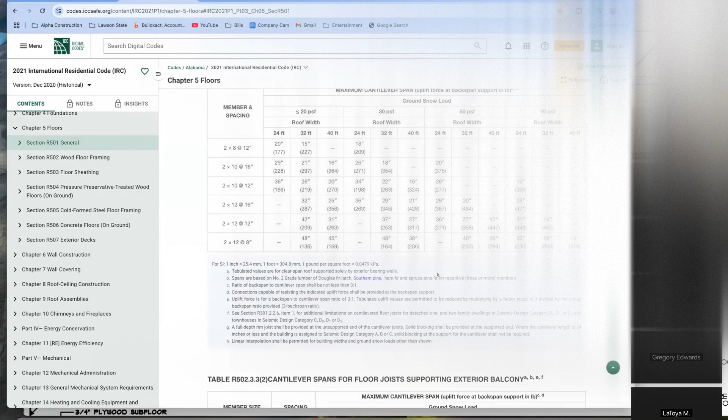So it talks about cantilevers. It says floor cantilever spans should not exceed the nominal depth of the wood floor. Floor cantilevers constructed in accordance with the table shall be permitted when supporting a light frame. So it tells you how to do those cantilevers, and it also gives you your cantilever spans. Then it gives you allowable girder and header spans.

If you want to look at the girder, remember we talked about the girders? That's what holds up the floor joists. It tells you where you've got to go. It says we aren't dealing with this in this chapter, you need to go to another chapter. Typically it's going to push you to the chapter on headers, the wall chapter. That's the next one. So it pushes you to chapter 6. It says the allowable spans of girders and headers, so girders and headers are treated the same by the code, fabricated of dimensional lumber shall not exceed the values set forth in tables R602. R602 means it's in chapter 6.

It talks about bearing walls, floor systems, joist framing, lateral restraint, bridging. I think we talked about that. Here's another important one, guys. It tells you how you need to notch. When you cut holes in floor joists, it gives you your tolerances. You can only make it this big or that big. Your holes can only be drilled a third of the width of the board. And you can only put them in certain places. You can't put a hole in the middle third right here. You can put it over here.

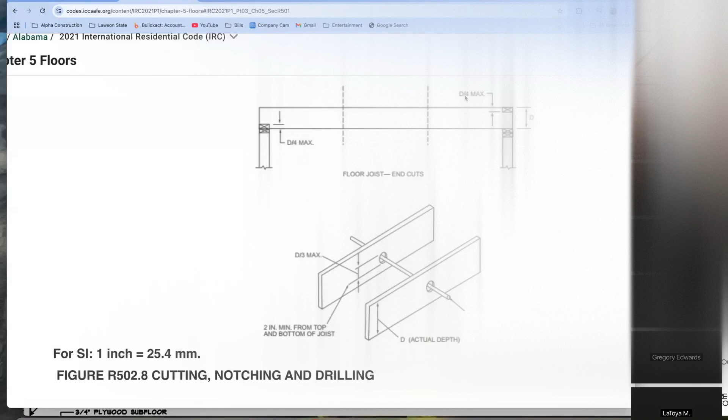And if you've got to notch it, you can only notch a fourth of the depth. So if I've got a 2x10, a 2x10 is almost 10 inches, actually it's 9.5 inches. So we divide 9.5 by 4. You can only notch a 2x10 about 2 1/4 inches. You can't notch that thing too much. If you do, you've messed up that lumber. You've got to replace that whole floor joist. You destroyed the integrity of that item.

What else are we talking about? Engineered wood. Your fasteners. It says floor framing shall be nailed in accordance. This tells you how to fasten everything, how many nails you should shoot in there. Remember you were out there shooting those nails? It tells you how many you need, and you can't shoot too many of them because then you're messing up the wood. Okay. Openings. It discusses openings, how wide you can make these things.

Wood trusses. Bracing. Truss design and drawings. It tells you the slope, depth, all the stuff you need to know. Draft stopping: it tells you to go back to R302. Fire blocking, I need to look at this. Fire blocking shall be provided in accordance with section 302.11. I'm going to write that down, guys, because this dude told me to do some fireblocking, and I don't think he's right. 302.11. I'm glad I went over this today.

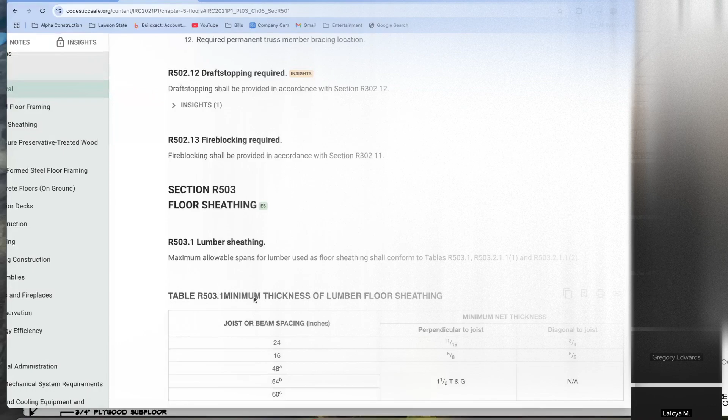We're gonna see if he's right in a minute. Sheathing, y'all know what floor sheathing is. That's your subfloor. It's identification, end joints. What else we got here? Just kind of getting you guys acclimated to this right here. Allowable spans, insulation, particle boards.

Are we in the right chapter? Let me see. 505. Now it gets into steel. Let me see if we got a picture of the steel frame. There we go, right there. Steel frame floor. I hardly ever go on this side of the book, man. I don't do too many steel frame floors, but it discusses that. Some people like to build their houses out of steel.

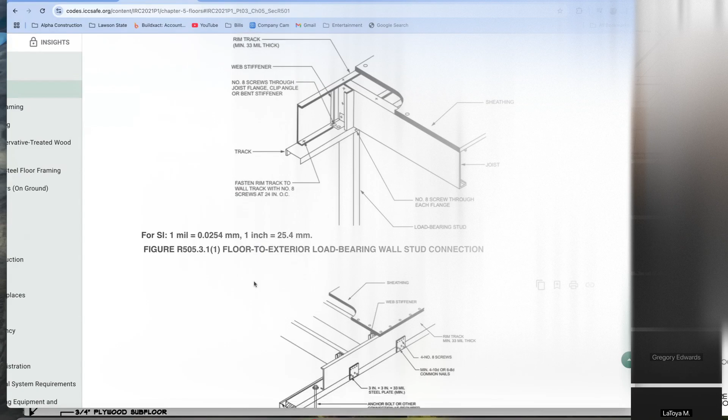Rich folks. Look at that. It's more complicated. Wood is just so much easier to work with. Look at all that. That's steel, man. At least you don't have to worry about it burning down. And then you got to cut that steel, man. That's got to be a headache. Jeez. All this right here is steel, guys. So this part deals with steel. You got concrete floors. So this part deals with concrete floors. Let's see if we got any cross sections and stuff.

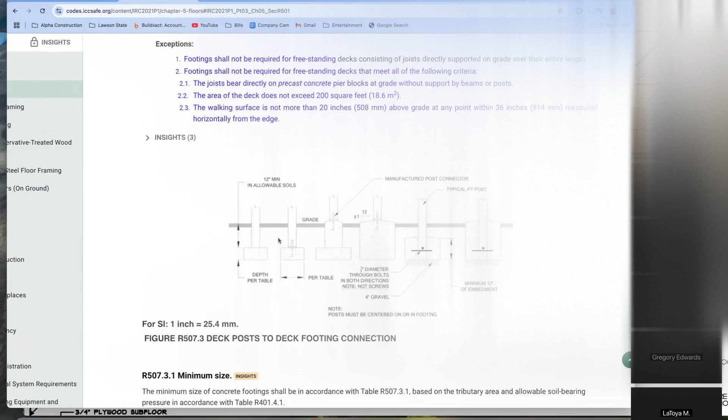What is this? Oh, this right here is your decks. So I got guys that build decks and stuff. So it goes over your decks. And this is 507. So it talks about how you need to build your decks, spans and stuff for your lumber on your decks. Remember that the deck is pressure treated. Okay, there we go. Yeah, it goes heavy into those decks, guys. I got some guys, that's all they want to do is build decks. Let's see, exterior decks. There we go.

Fasteners, tell you what kind of fasteners you got to use. A lot of time in the code, it tells you, okay, fasteners, metal fasteners, and connectors used for all decks should be in accordance to R317.3 and table 507.2.3. Let's look at one of them right there. Let me just find one. So R507.2.3. Let's just go look at one of those and see what it looks like. Well, that is right there, 507.2.3. This is the table right here.

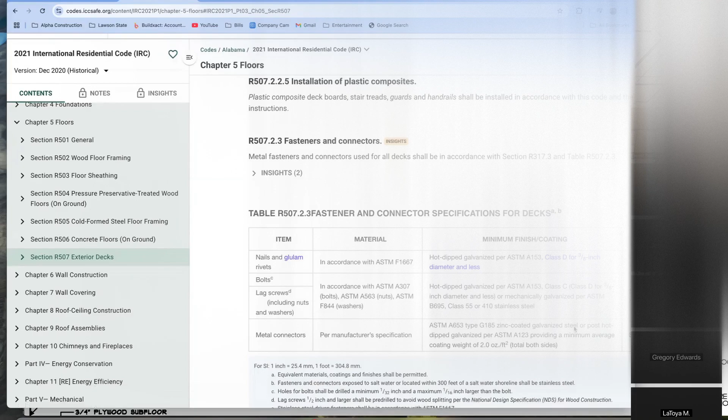Stainless steel, silicon, bronze, or copper. Hot dip galvanized. You see? Nails and glulams, the bolts, they need to be hot dip galvanized. Your washer needs to be the same. See, it tells you how everything needs to be done, guys. Questions on that? Y'all see this? There's nothing that you really need to be guessing about when you guys are building a house.

Now, please don't try to go around here and memorize this stuff. You guys just need to be able to go to this code book and find it. That's what we need to be able to do. We don't need to be memorizing a phone book. Too much information, but you need to know how to find it. That's why when you take the home builders licensing test, they just care about you being able to find the code.

All right. What was that code I was trying to look at? 302.11. Let me just see. 302.11. Y'all see how I'm looking for that? Get on up there. 302. Fireblock, and here we go.

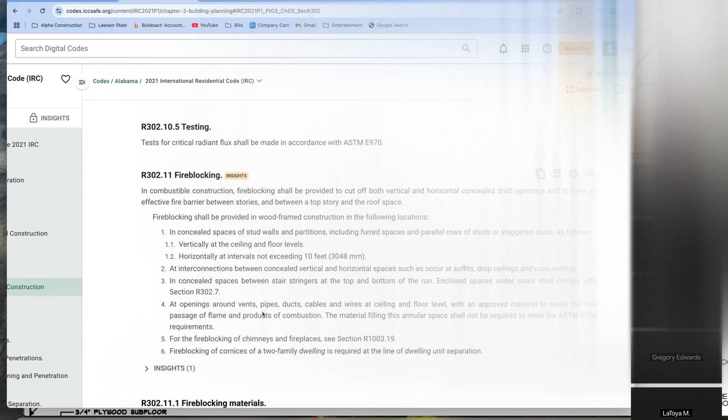That's only on combustible areas though. So yeah, I think he was wrong and I was right. I'm always right, even when I'm wrong. Fireblock 6. Okay.

All right, guys, let's stop right there, man. Questions? Anybody got any questions, anything, man? This is 6, I gotta charge. I should have charged up this thing. Questions? You guys got any questions?

Everybody good? Still lifting weights, man? You finna start doing bodybuilding and stuff? Yeah, man. I used to be into that stuff back in the day. I used to want to be... you playing soccer? Okay. Yeah, you gotta find something to get that energy out, man. And lifting weights, man. I got me a whole nice little... I gotta get back in the weight room in my own house.